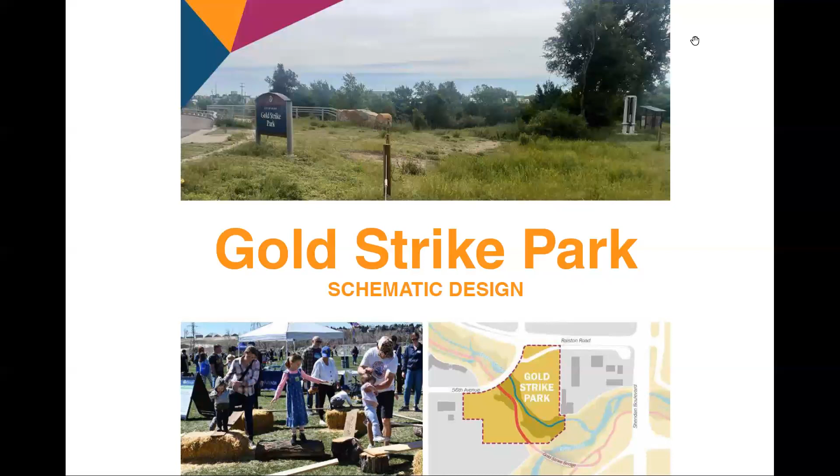Some of the highlights we heard were to make this a destination and to focus on the educational value of the site. We heard from many families that they really enjoyed nature-based play and that shade, lighting, and restrooms were a necessity. In addition, it was important to celebrate the rich history of Arvada, enhance trails and regional connections at this potentially iconic gateway to the city.

Lastly, in our outreach efforts, 5 park planning themes emerged from which we organized the park elements: play, gather, grow, connect, and learn. In response to the question, what play elements and play experiences would you like to see added to the park?

We heard nature play that connects to the creek, gold panning play connecting to the history of the site, and playful elements along the trail.

What elements would improve community gathering opportunities in the park? We heard creek overlooks, seating along the trail, and small picnic areas, as well as community pavilion, flexible market and event space, and a gathering lawn.

In terms of grow, in response to the question, how would you like to see habitat enhanced and restored in the park? We heard native wildflower habitats, expanded tree canopy for shade and habitat, places to explore at the confluence of Ralston and Clear Creeks, bird and bat nesting boxes, and places to explore improved stream habitat.

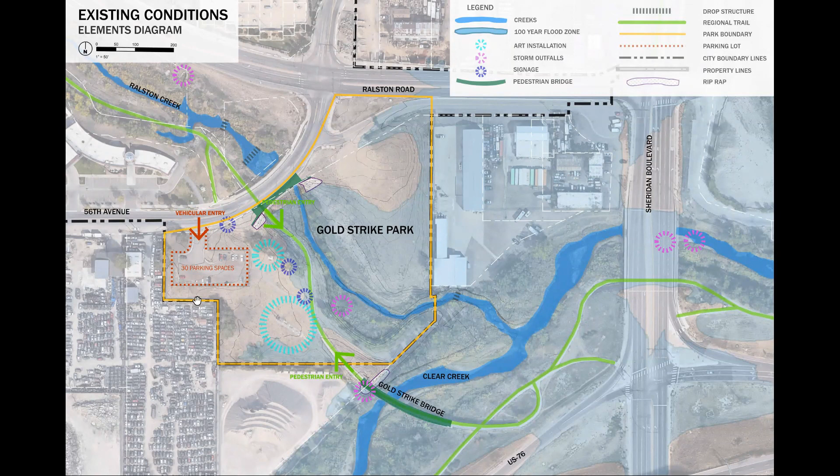There are 2 existing sculptures intended to remain in place, and Arvada's regional bike trail bisects the park. Gold Strike sits between industrial areas to the west and east, and is bordered by US 76 to the south and Ralston Road to the north. The current entrance via vehicle is right off of 56th Avenue there.

In this opportunities and constraints map, we can see how the existing conditions guide the framework of the site plans in regards to locating proposed amenities. This design aims to buffer the surrounding industrial areas with planting and parking.

It also aims to use the flat areas out of the floodplain for permanent structures as well as parking. Highlight the existing sculptures on the west side in the design and use some areas of high quality habitat near the downstream portion of the creek. Much of the uplands is low quality habitat, including many noxious weeds.

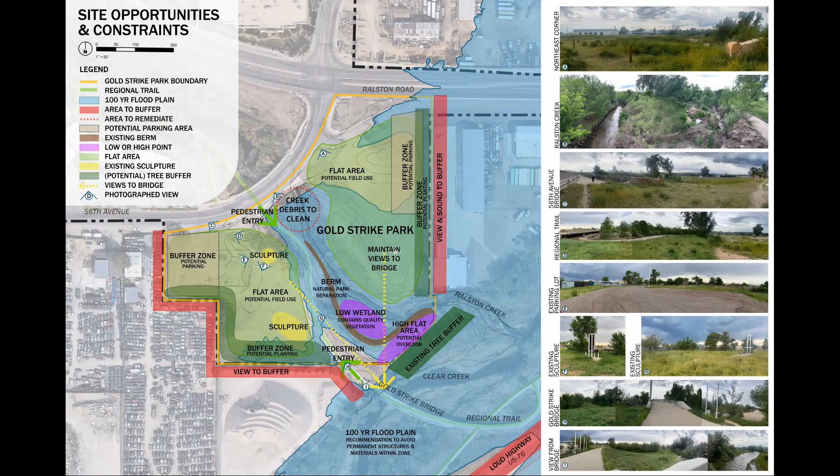Based on site analysis and feedback from the first engagement window, 2 concepts were developed. While they're distinct in the organization of the amenities and circulation, both include the following features.

With regards to interactive play, both include nature play, gold strike themed play, and historic and interpretive educational elements. In terms of places to gather, both include a flexible event lawn, shade, seating along the trails, and restrooms.

Growing better habitats include a pollinator meadow, habitat improvements, interpretive garden and elements, creek and wetland improvements, landscape buffers and berming, as well as bird and bat boxes.

And in terms of making better connections, designs include soft and paved trails, low flow creek crossings, a pedestrian bridge or bridges, and regional trail improvements. They also provide opportunities to facilitate learning, including creek overlooks, covered and uncovered picnic areas, and educational pavilion signage.

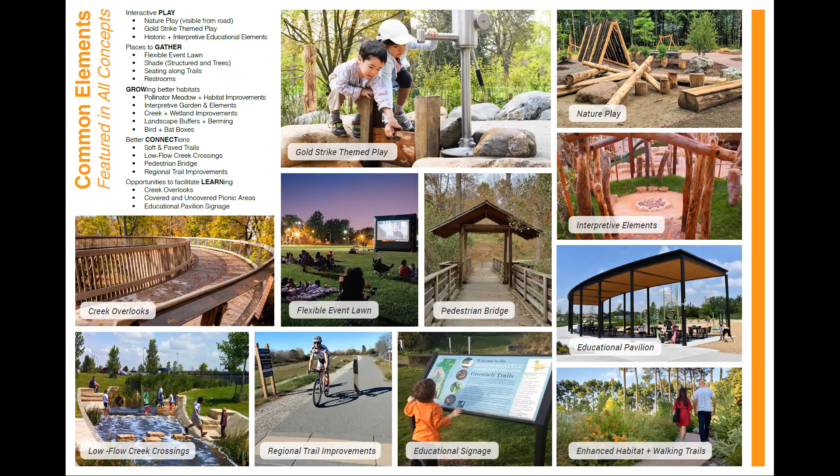To introduce Concept A, the design team put together some precedent imagery. Concept A, which we're calling Wandering Creek, contains features like regional nature play, pollinator gardens, restored wetlands, and a flexible event space for things like movie in the park or group gatherings.

This concept has more passive recreation with more elements in their natural form and less built amenities. It focuses more on creek interaction. The unique features in this concept are a natural splash pad with a wetland boardwalk and overlook, and gold panning play.

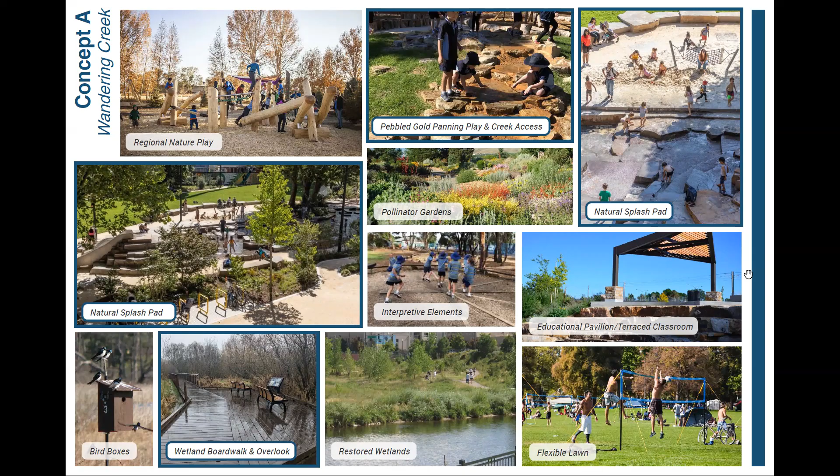Concept A focuses on reconnecting the two sides of Gold Strike Park through meandering loops that circumnavigate the park and interact with Ralston Creek. It embraces the restored native habitat between two pedestrian bridges that anchor the north and south edges of the park and contain fewer permanent built features.

In terms of the park planning theme Connect, two central axes connect the eastern and western sides of Gold Strike Park, anchored by pedestrian bridges to the north and south. Each axis is headed by a large shade pavilion, which directs views into centralized open spaces that step downhill toward overlooks at Ralston and Clear Creeks and native landscapes. Internal trails run alongside the regional trail through half the park, providing visibility and improving safety.

In regards to the park planning theme Grow, a restored Ralston Creek corridor contains a boardwalk, a low flow crossing, and overlooks that traverse through improved wetlands, bird boxes, and creek play.

In terms of the park planning theme Gather, a flexible gathering space lies adjacent to the regional bike trail to the south, contains themed naturalistic elements, and has shaded seating for visitors to gather and watch, while visually concealing the neighboring industrial properties.

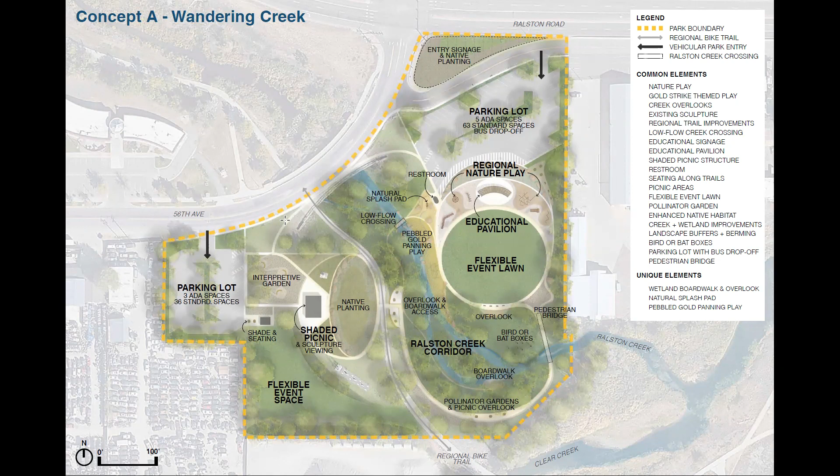The final park planning theme of Learn is achieved through three interpretive walking loops, which provide opportunities to learn more deeply about the site's past history, present ecological benefits, and future desired use. Stories of gold panning, indigenous history, and ecological education are told using distinctly paved walking paths that circumnavigate the park, passing through interpretive gardens and themed elements.

These looped walking experiences selectively connect at points of shared histories and meander away towards unique themed features, anchoring the two sides of the park. The unique paving patterns can be created using surface treatments or inlays in concrete sidewalks, as well as using soft surface materials like crusher fines.

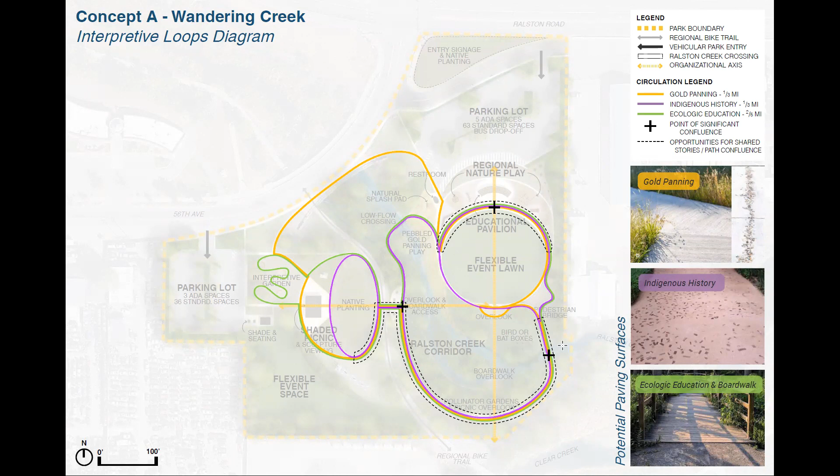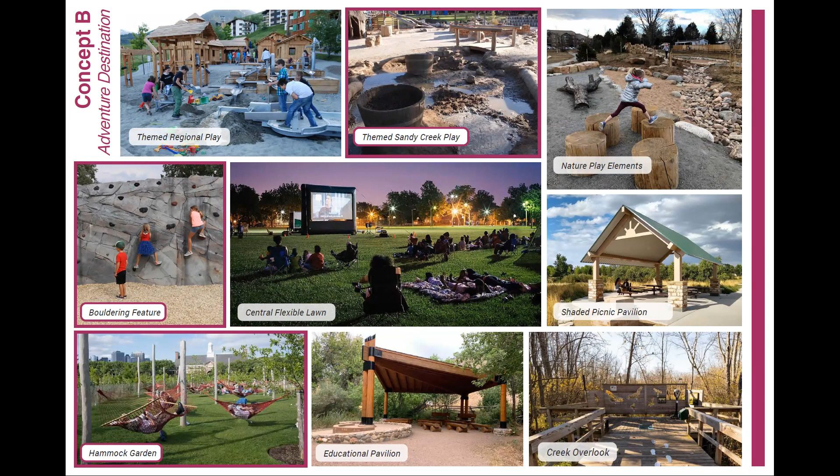Concept B, Adventure Destination, also contains elements like a flexible lawn, an educational pavilion, and nature play, but uniquely has more active adventure features like a large bouldering feature, a hammock post garden, a robust Sandy Creek play area, and a larger flexible space to the south that could accommodate larger active site programs like farmers markets or sports of various sizes. This concept has more theme-built features and natural materials to help educate about the site's history through active interaction.

In this concept, in regards to the Park Planning Theme Connect, a central axis featuring a pedestrian bridge connects the two complementary eastern and western sides of Gold Strike Park. It is anchored by two large pavilions.

In regards to the park planning theme Grow, a restored Ralston Creek corridor flanks either side of the bridge with a wetland to the south and creek play access with a low flow crossing to the north. The bridge opens to the regional bike trail on the western side, leading to a trail-adjacent flexible event space and an area to view the gardens and existing sculptures.

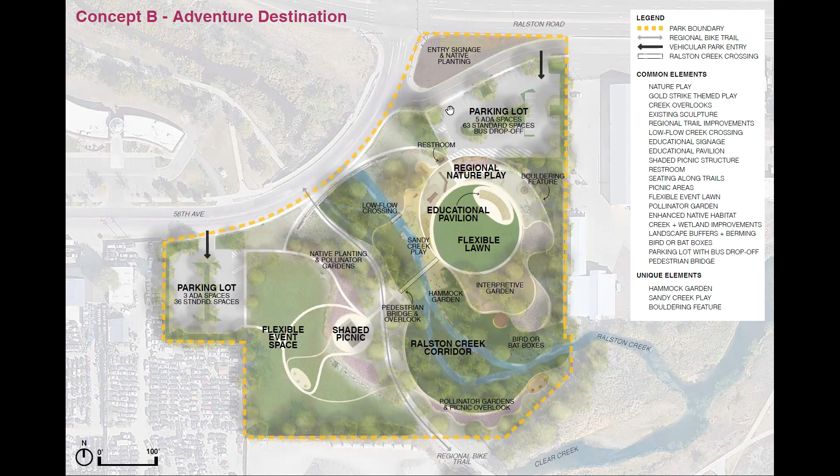Like Concept A, Concept B provides learning opportunities through looped walking experiences surrounding gold panning, indigenous history, and ecological education. These loops are primarily organized along a central axis, connecting two sides of the park. They traverse through interpretive gardens and themed built elements sited at the confluence of these stories and pathways.

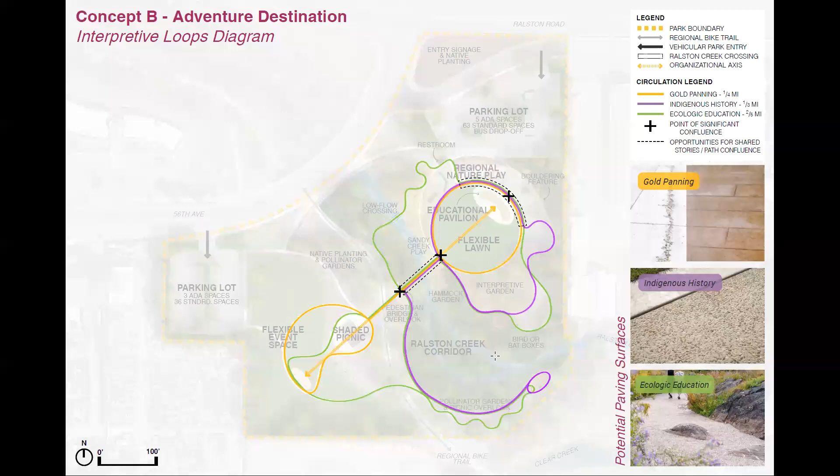This would also feature three distinct paving types that create ADA-compliant hard and soft walking surfaces. That concludes our presentation.